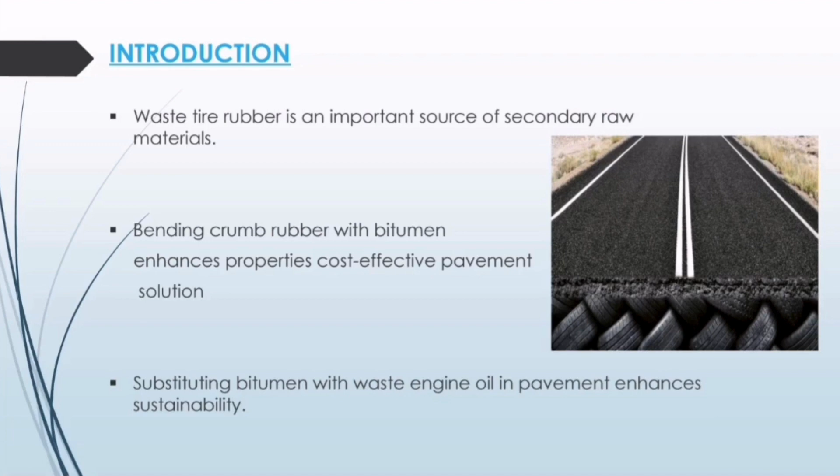Introduction: Waste tire rubber and engine oil offer sustainable solutions for asphalt pavements, enhancing properties while addressing environmental concerns. However, recycled aggregate and admixtures contribute to pollution, requiring attention to environmental issues.

Problem statement: Dumping recycled aggregate harms the environment, while traditional aggregate usage depletes resources and escalates costs. Although higher recycled aggregate content in asphalt may improve rutting resistance, it can worsen thermal cracking.

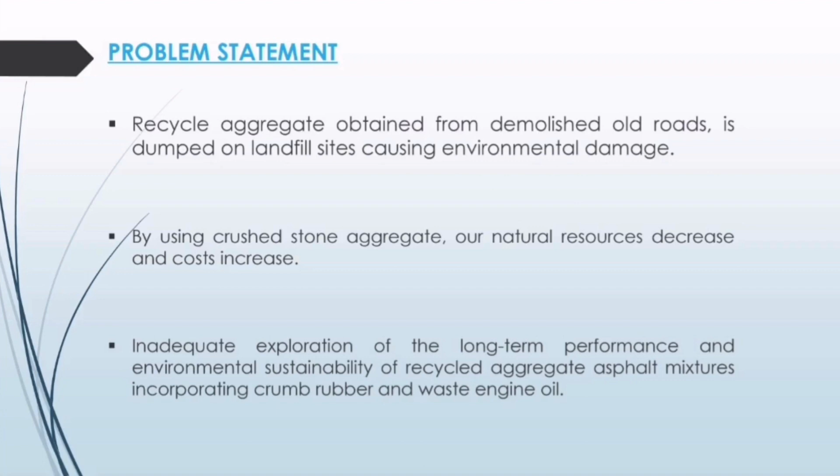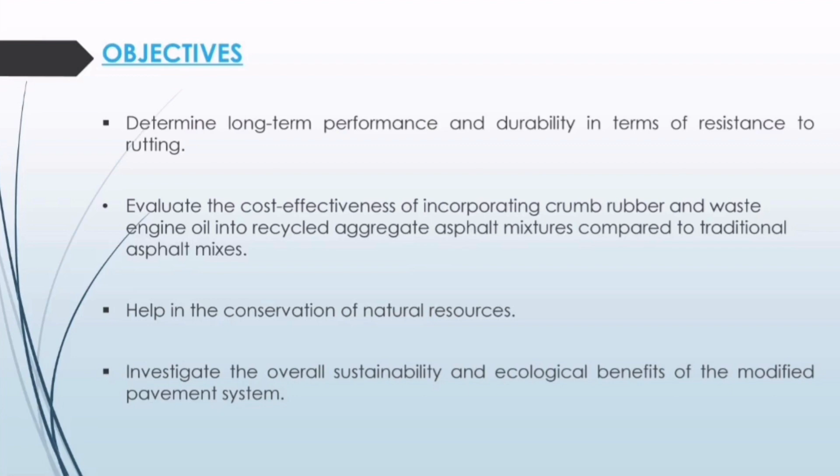Objectives: Assess long-term performance and durability, focusing on cracking, rutting, and moisture damage. Evaluate economic feasibility compared to traditional asphalt mixtures. Contribute to natural resource conservation and overall sustainability.

Targeted Sustainability Development Goals: There are 17 goals set by the United Nations to attain a sustainable future. Our research will target SDGs 8, 9, 11 and 13.

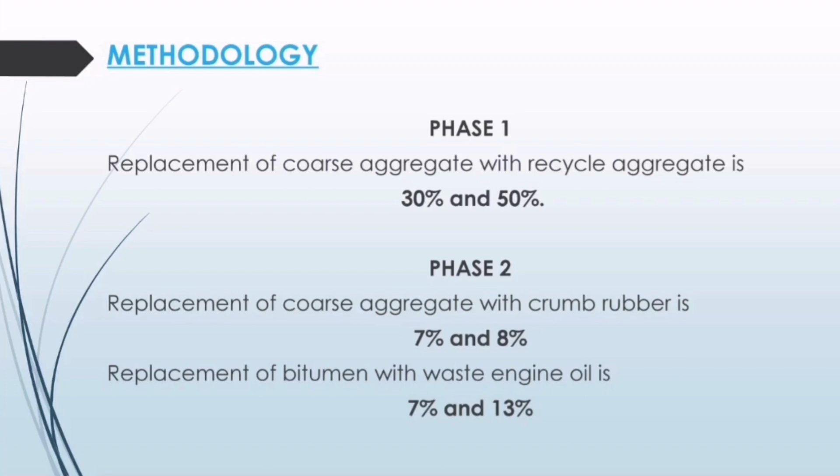Methodology: Replace coarse aggregate with recycled aggregate at 30% and 50%. Incorporate Crumb rubber at 7% and 8%, and waste engine oil at 7% and 13%, into the mix. Conduct various tests to evaluate stability, density, rutting, and other properties.

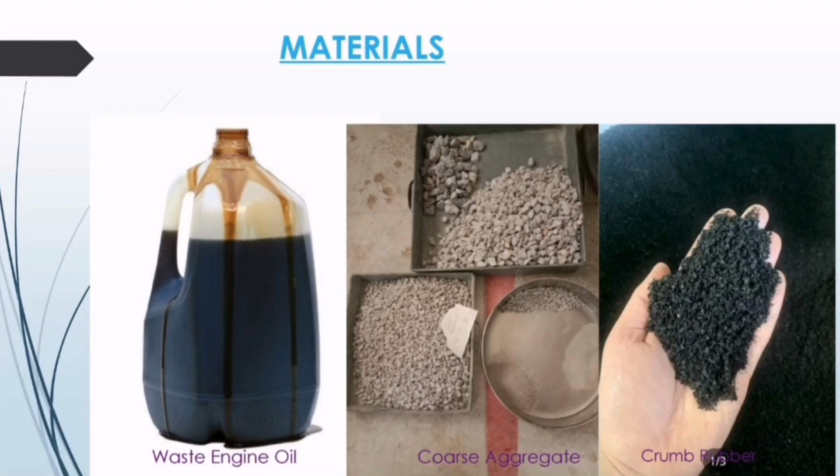Materials used in the project: aggregate, waste engine oil, Crumb rubber, bitumen, and methylene chloride to clean and recycle asphalt pavement. Mix proportions and quantities of materials were also determined.

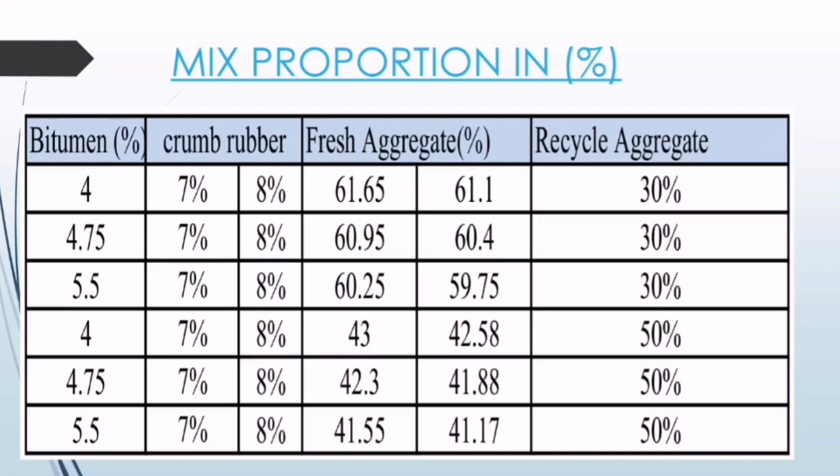We use Crumb rubber at 7% and 8% of the aggregate. The percentage of fresh aggregate is 50% and 70%, and recycled aggregate is 30% and 50%.

Results: Crumb rubber enhances bitumen properties but reduces ductility. Optimal bitumen content identified as 4.76% for penetration grade 60/70.

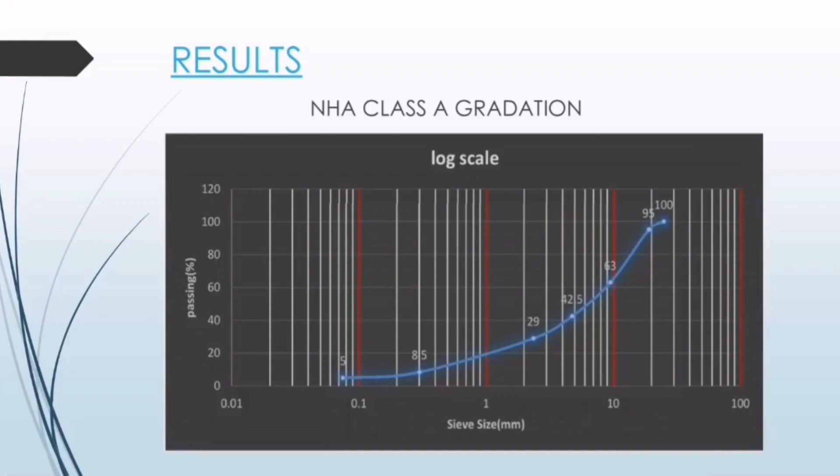A sample with 7% Crumb rubber, 7% waste engine oil, and 50% recycled aggregate had a maximum rutting of 11.89, while one with 8% Crumb rubber, 7% waste engine oil, and 30% recycled aggregate had a minimum rutting of 4.87.

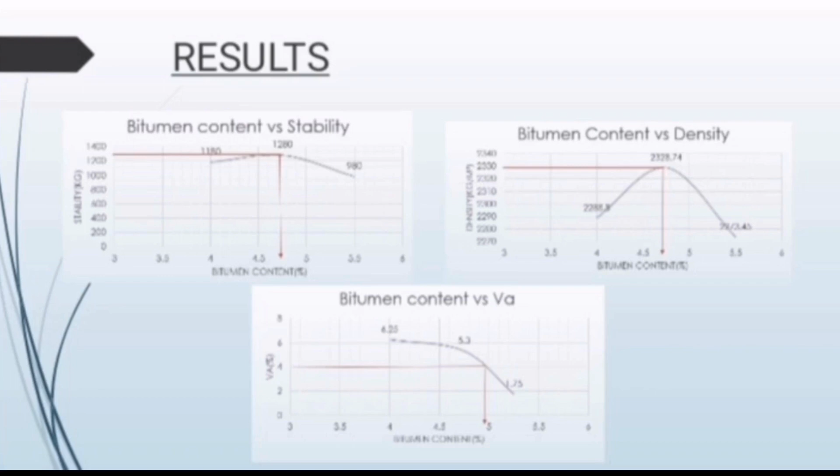Conclusion: Bitumen properties like softening point, flash point, and fire point rise with Crumb rubber addition. The optimum bitumen dosage is 4.76% based on performance grade 60/70.

In wheel tracker tests, 7% Crumb rubber, 7% WEO, and 50% recycled aggregate resulted in max rutting of 11.89, while 8% Crumb rubber, 7% WEO, and 30% recycled aggregate showed min rutting of 4.87.

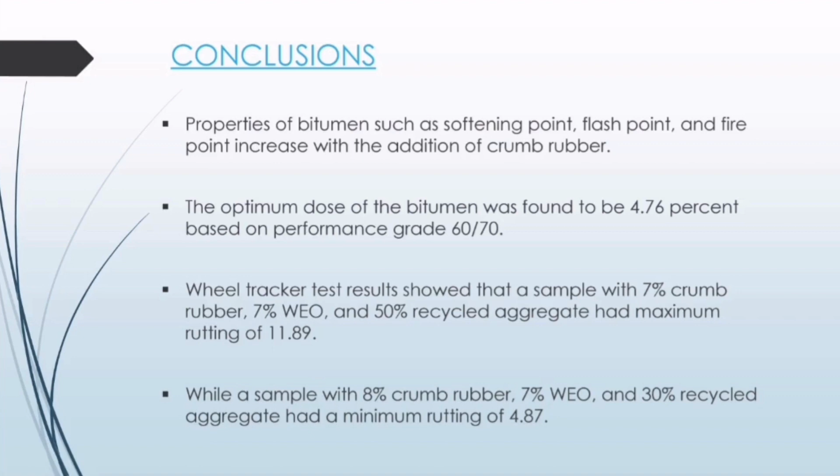Socioeconomic benefits: Utilizing recycled aggregate reduces dependency on traditional coarse aggregate, preserving resources. Recycling minimizes landfill waste, pollution, and ecosystem degradation, promoting public health and community well-being.

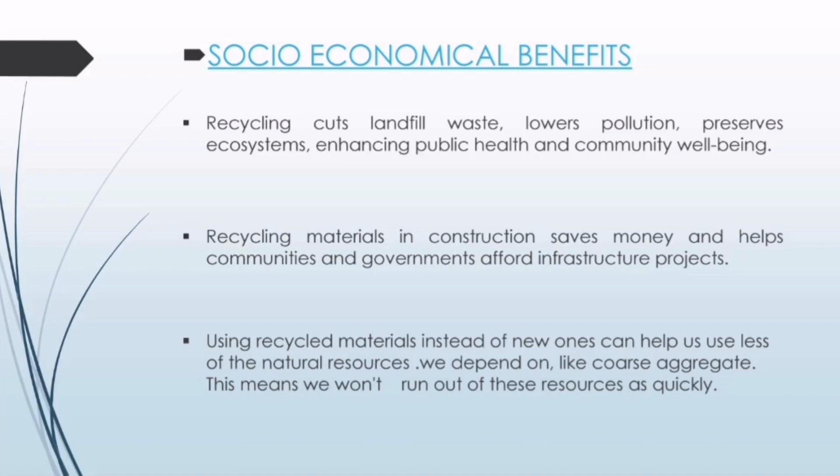Incorporating recycled materials reduces construction costs, enhancing economic viability.